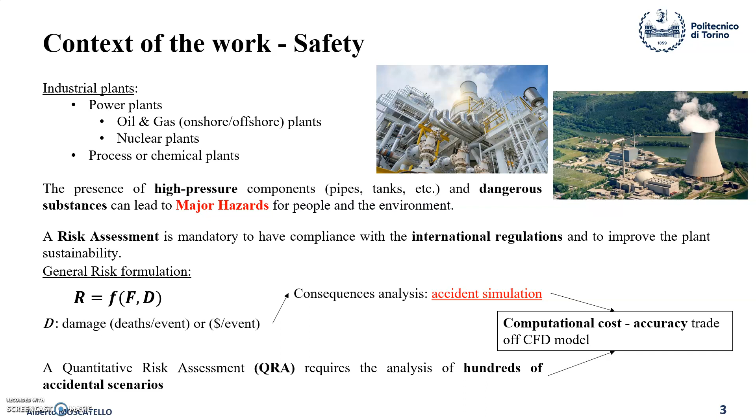My activity focuses on the accident simulation for quantitative risk assessment purposes, and in particular on the conceptualization, development and validation of a CFD model for high pressure gas releases. The model is based on the splitting of the phenomenon into stages.

The first one accounts for the compressible supersonic flow near the release point, which is characterized by complex fluid dynamic structures and by some strong discontinuities in the flow field, due to the presence of a Mach disk, for example, and is simulated in a small domain called source box. The results of this simulation are used as input for the second stage, which is the dispersion in the case study environment, which is now an incompressible flow.

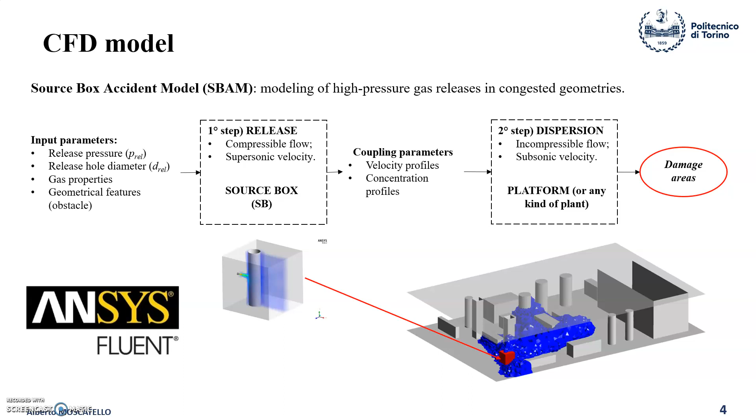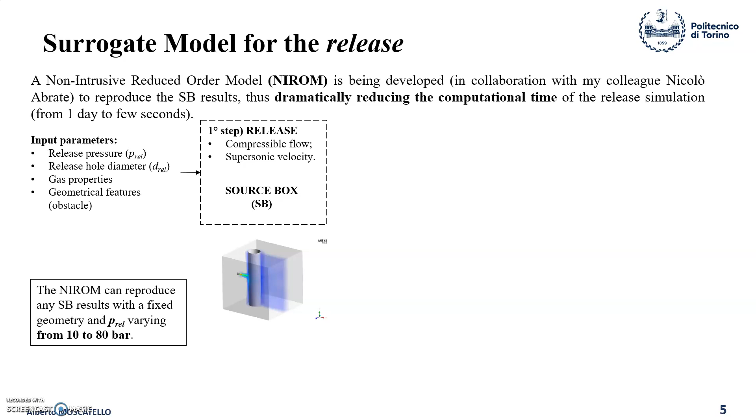This method permits to have different assumptions for the two simulations, so it simplifies the implementation and also simplifies the mesh generation. Another advantage is the computational time, which can be dramatically reduced implementing a reduced order model on the source box, which is what we are working on now, and we are testing the accuracy on the final results, which is the result of the dispersion. Till now we have obtained some promising results in terms of accuracy on the flammable volumes and all the risk measures that we have used.

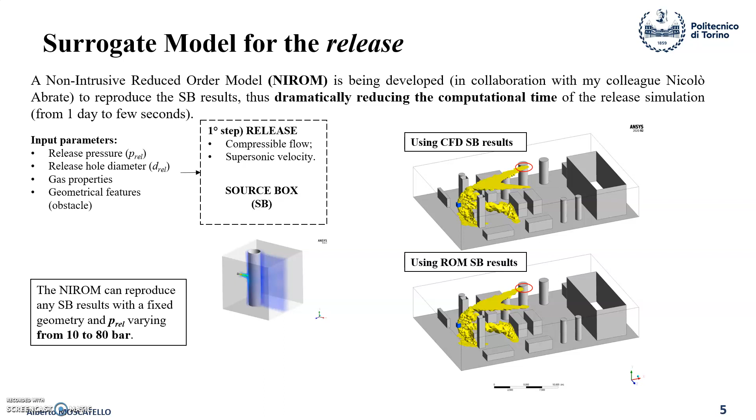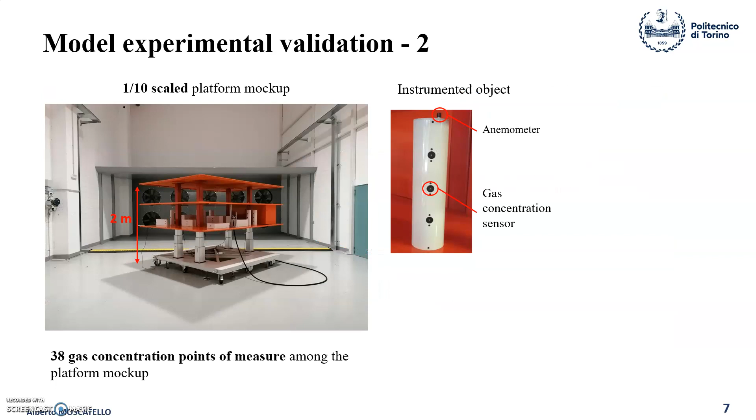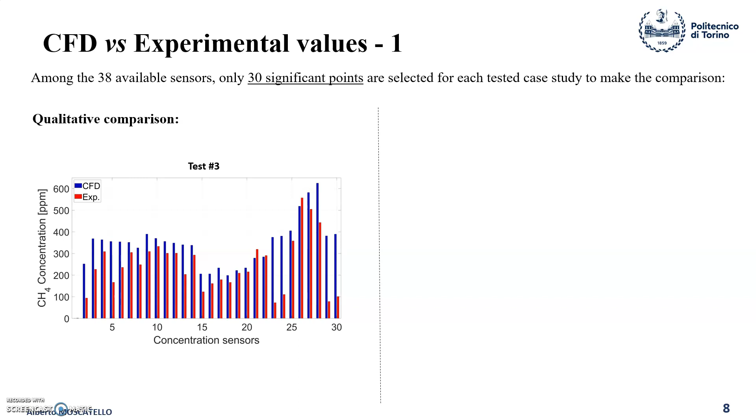Then we have used a robust methodology employing some statistical parameters to compare the predicted and observed data, and according to the available range of acceptability in literature, we have found that the model has a good prediction in most of the case studies, and also it shows a good correlation between predicted and observed data.